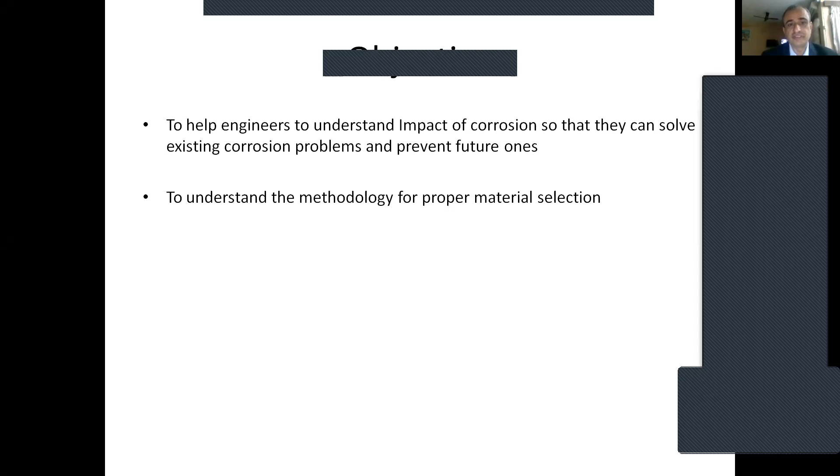The objective is to help engineers understand the impact of corrosion so that they can solve existing corrosion problems and prevent future ones, and to understand the methodology for material selection. I will cover this topic briefly. It could be a series of lectures on corrosion, but I will give you a brief introduction, and if another opportunity is given, I will connect those topics with this.

So, corrosion actually has a huge impact which is often overlooked. India is spending a huge amount of money on corrosion mitigation; the corrosion cost is very high for India.

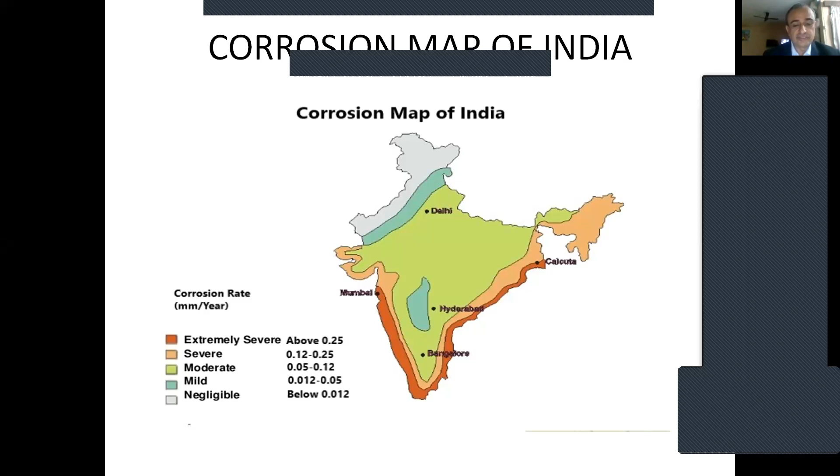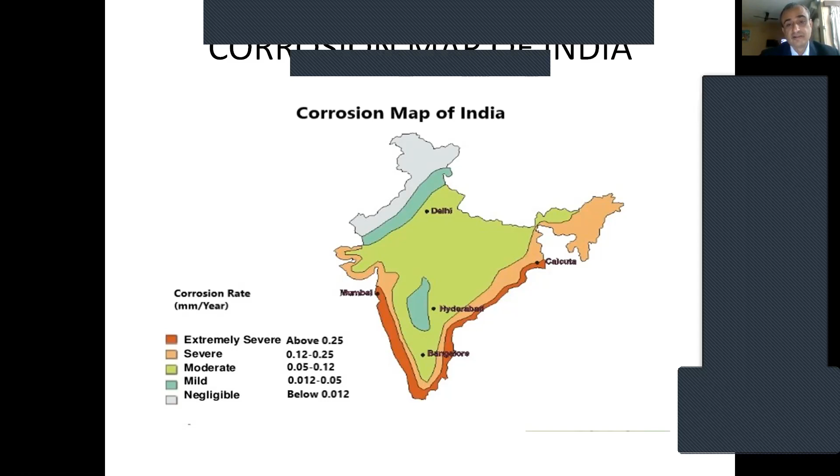So it's a huge cost for India due to corrosion. If you see the coastal line, around 7,000 kilometers from Mumbai to Calcutta, it is highly corrosive, with a corrosion rate of around 0.25 millimeter per annum. We are spending a huge amount of money on infrastructure and facilities. So just being aware of what corrosion is, the next topic can be how to mitigate it and what actions should be taken to mitigate corrosion.

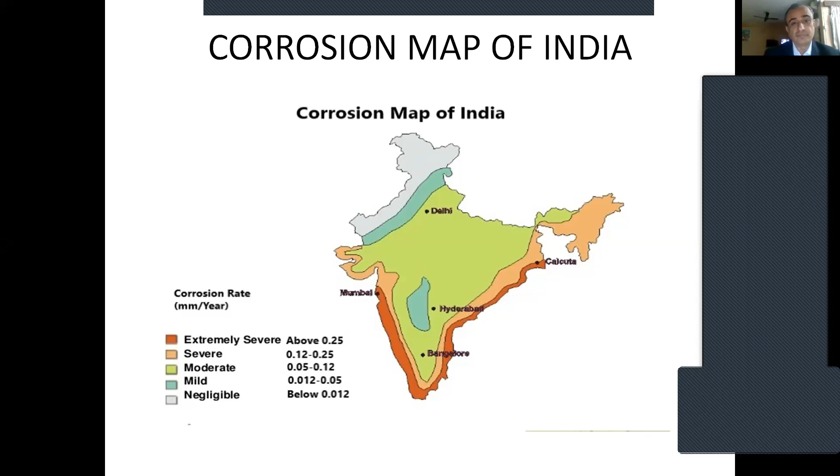Next slide is on corrosion. What is corrosion? It is the degradation of material by chemical reaction with its environment, as everybody is aware.

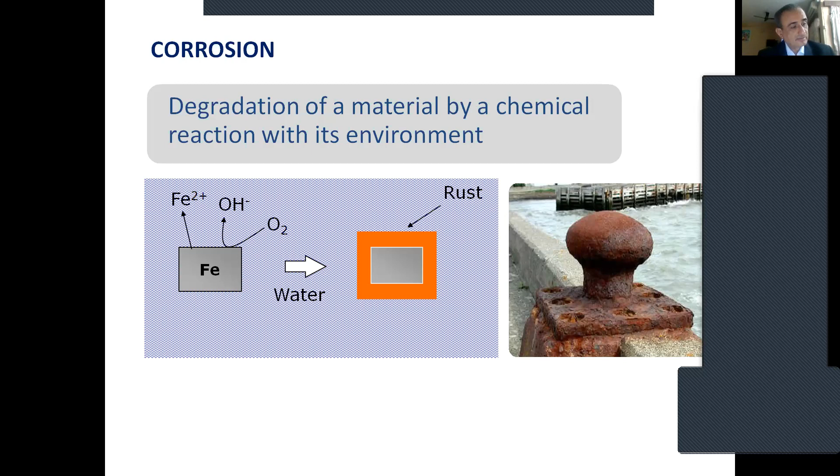Stainless steel: stainless is not always stainless. The passive layer on stainless steel consists mainly of chromium and iron oxide, and forms spontaneously in an environment containing enough oxidants. If the metal surface is exposed to mechanical damage, like a small scratch, the passive layer comes back immediately and it becomes stainless again. But if there are heavy scratches or dents, the original passive layer surface will not come back, and corrosion happens.

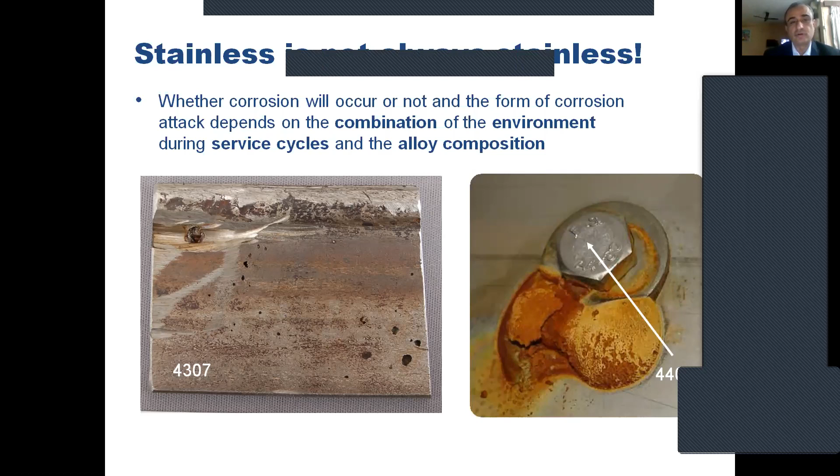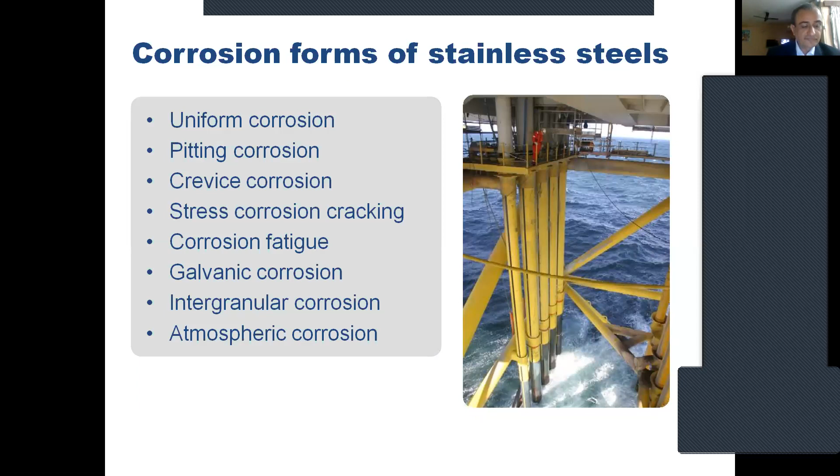I'll show you how many types of corrosion there are. The forms of corrosion in stainless steel are: uniform corrosion, pitting corrosion, crevice corrosion, stress corrosion, fatigue corrosion, galvanic corrosion, intergranular corrosion, and atmospheric corrosion. Different media and service conditions can cause different types of corrosion attacks, which may vary in nature and appearance.

Uniform corrosion occurs uniformly over the entire exposed surface or over a large area. Most cases of uniform corrosion occur in strong acid or hot alkaline solutions. It can be predictable too; if there's a constant rate and constant conditions, it can be predicted how many days it will take for this corrosion to happen, or how long the material will last.

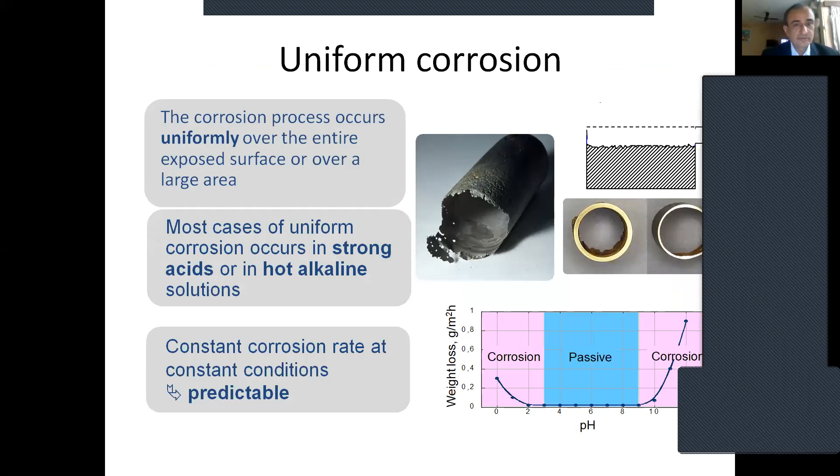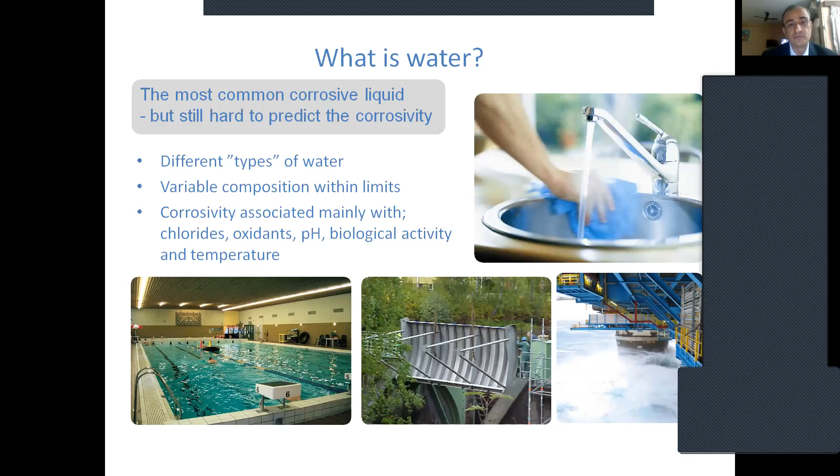There are many kinds of water - tap water, swimming pool water, and sea water - with different types and variable compositions within limits. Corrosivity is mainly associated with chloride, oxidants, pH value, biological activities, and temperature.

This chloride content in the tap water is around 250 ppm, less than 250 ppm. But salty taste is more than 250. Brackish water which mixes with the sea is around 3000 ppm, and sea water is 20,000 to 30,000 depending on the area. Different seas have different ppm. If you go to the Kolkata side, it's more ppm. If you go to the Bombay side, it's less ppm. So it varies area to area, but sea water chloride content is typically 20,000 to 30,000 ppm.

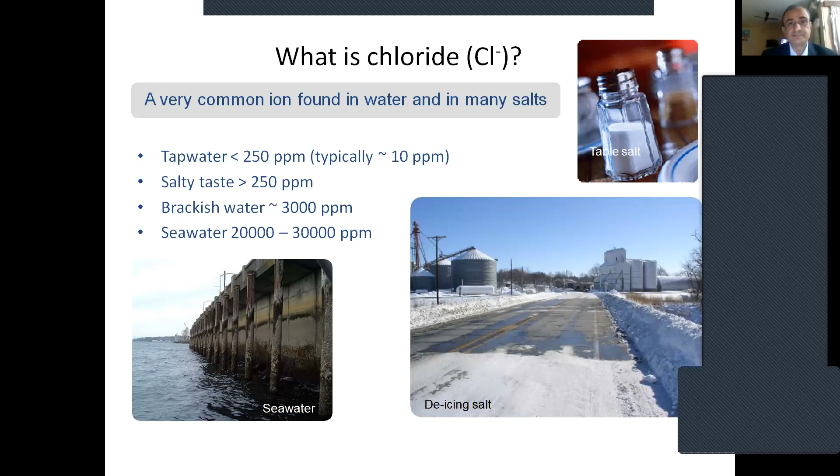This is another form of corrosion called pitting corrosion. Chloride ions cause a local breakdown of the passive film. The passive film is a very thin layer on the stainless steel surface, about 1/100th of the thickness of a postcard. That thin passive layer on the stainless steel prevents the surface from becoming corroded, so chloride causes a local breakdown of that passive film.

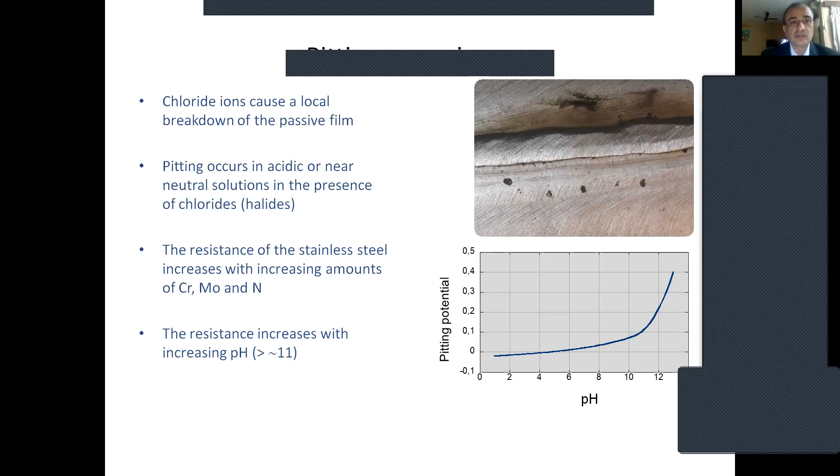Pitting occurs in acidic or near-neutral solutions in the presence of chloride or halide. The resistance of stainless steel increases with increasing amounts of chromium, moly, or nitrogen - these are elements in stainless steel. There are different kinds of stainless steel which I will cover in the future if I get the chance. The resistance also increases with increasing pH value greater than 11.

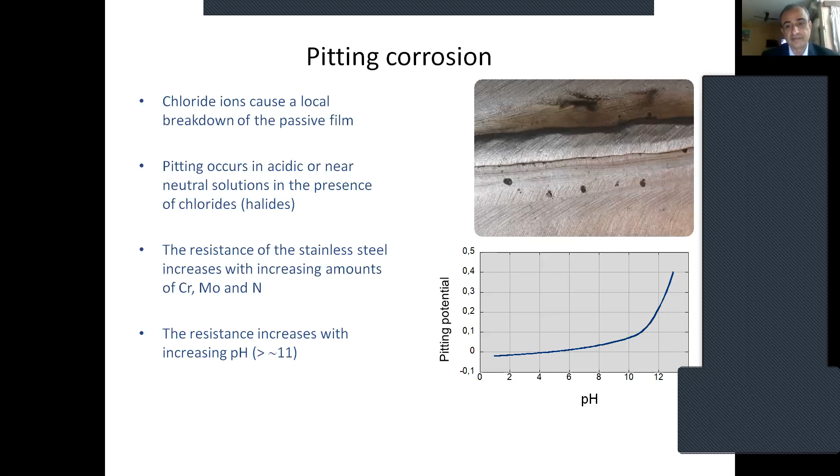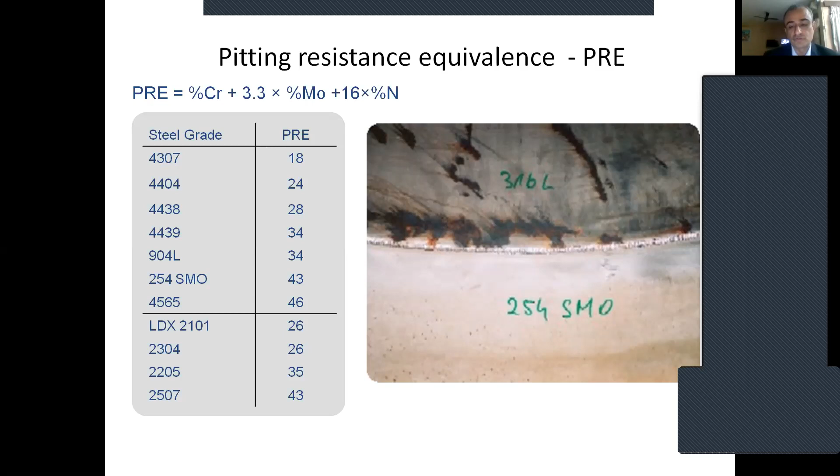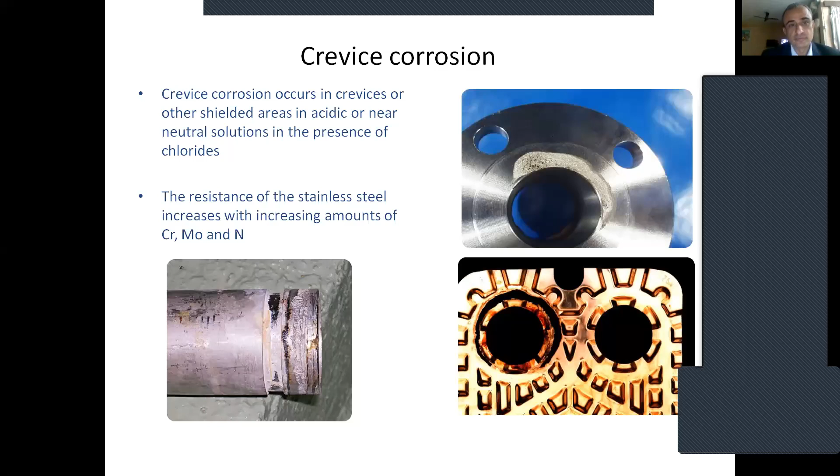Crevice corrosion is the example of flanges, or other areas like pipes and fittings. Where it's a shielded area, you can say crevice or other shielding area, it occurs in acidic or near-neutral solutions in the presence of chlorides. The resistance of stainless steel increases with increasing amounts of chromium, moly, or nitrogen - again, increasing these elements increases the corrosion resistant properties.

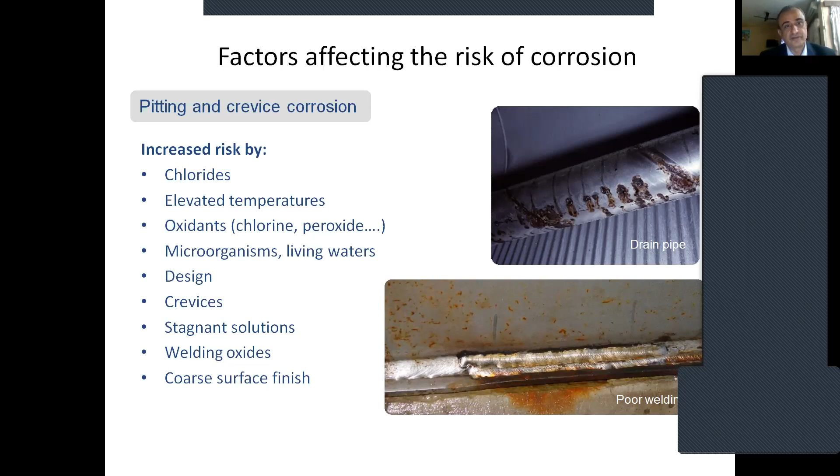Factors affecting crevice corrosion: the increased risk of corrosion, pitting and crevice comes from chloride, elevated temperature, oxidants, microorganisms, living waters, design crevices, stagnant solutions, welding oxides, and coarse surfaces. These are the factors affecting poor welding or drain pipes - you often see this kind of corrosion at various places, maybe in homes or offices.

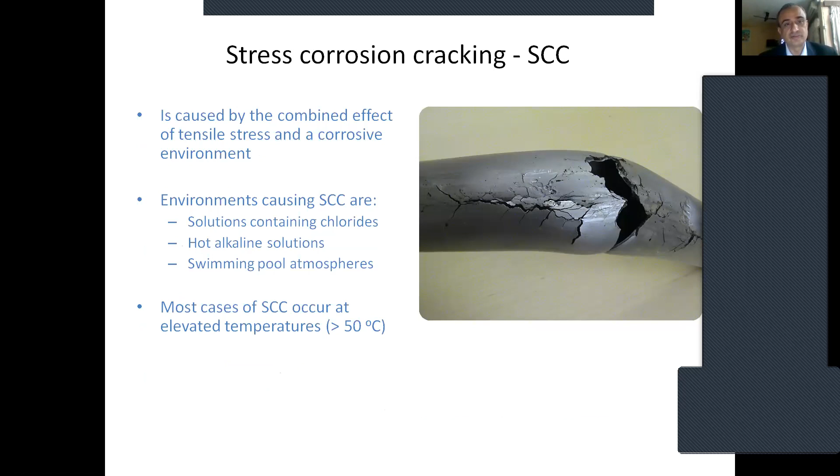This is stress corrosion cracking. It occurs due to elevated temperature and solutions containing chlorides, hot alkaline solutions, or swimming pool atmosphere environments - the combined effect of tensile stress and corrosive environment, caused by tensile stress and corrosive environment at elevated temperature. This occurs in swimming pools where load-bearing concrete roofs collapse due to stainless steel in safety-critical load bearing applications, in environments created by indoor swimming pools with anchored roof surfaces. This is stress corrosion cracking.

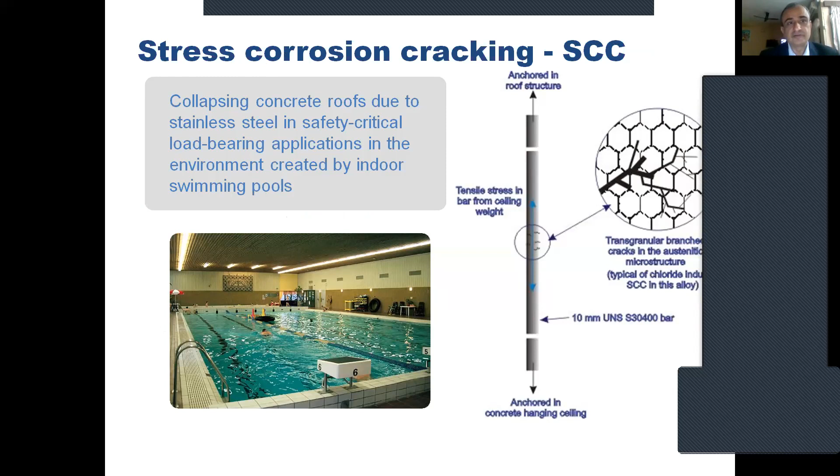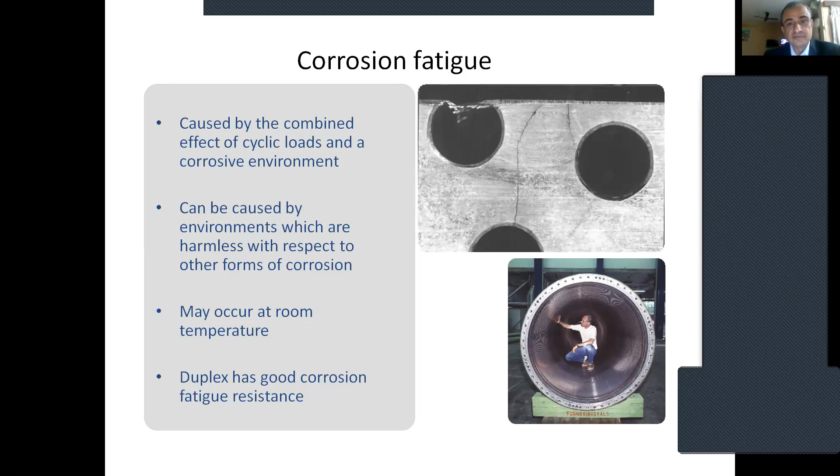Corrosion fatigue: it is well known that material subject to a cyclic load can fail at a load far below the ultimate tensile stress of the material. If the material is simultaneously exposed to a corrosive environment, failure may take place even at a lower load and after shorter times. So it's caused by the combined effect of cyclic load and corrosive environment, and can be caused by environments which are harmless with respect to other forms of corrosion - it may occur at room temperature. Duplex stainless steel has good corrosion fatigue resistance properties.

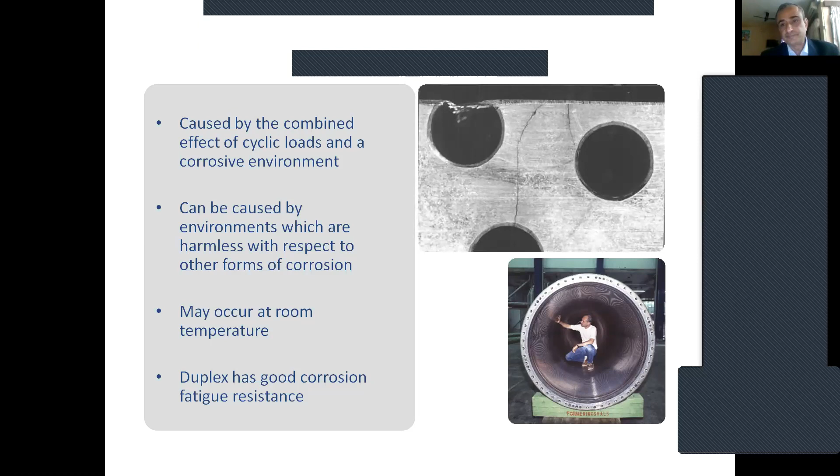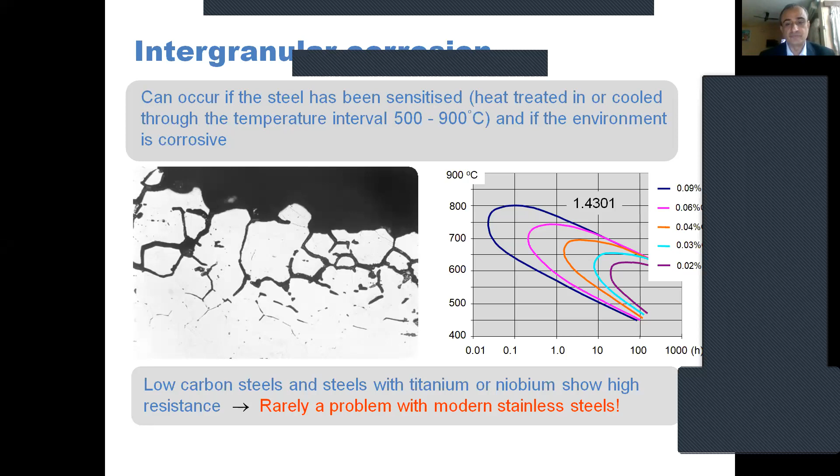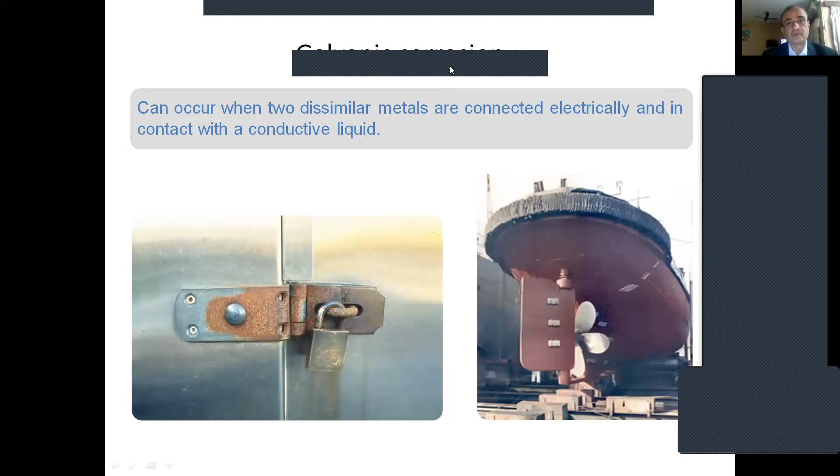The galvanic corrosion were two different... one minute, sorry sir, one person was waiting there.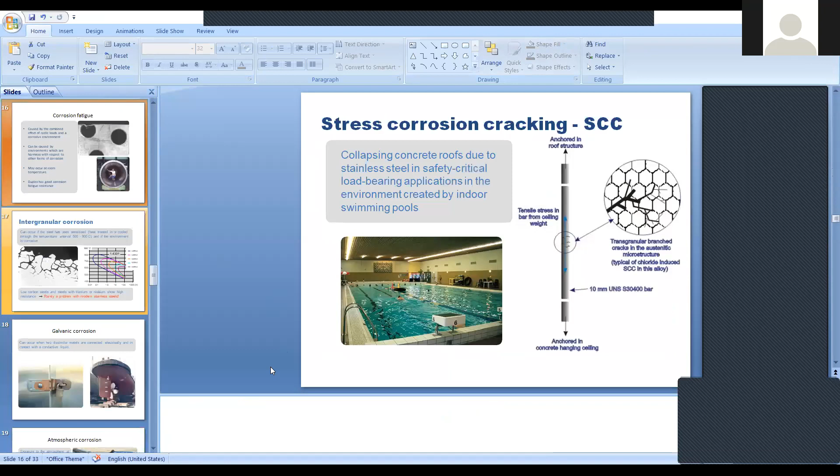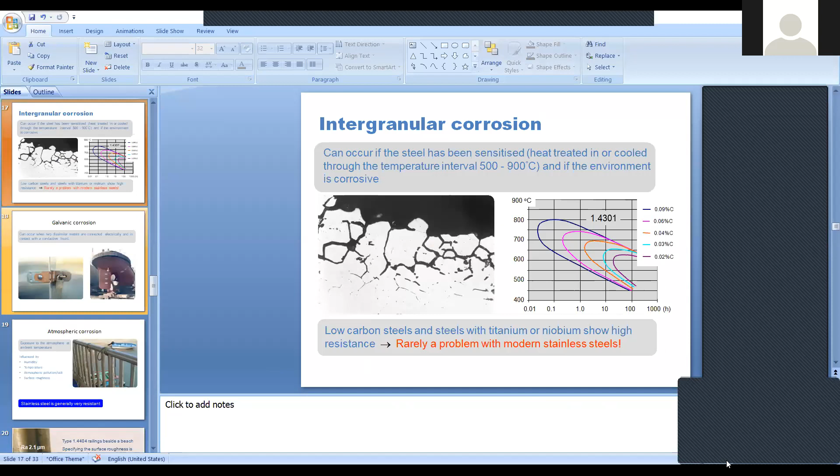Galvanic corrosion occurs where two dissimilar metals are connected electrically and in contact with a conductive liquid. So this is galvanic corrosion.

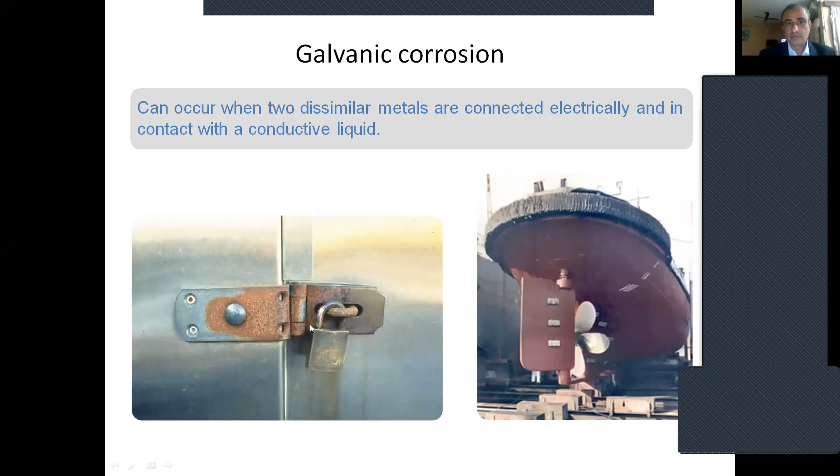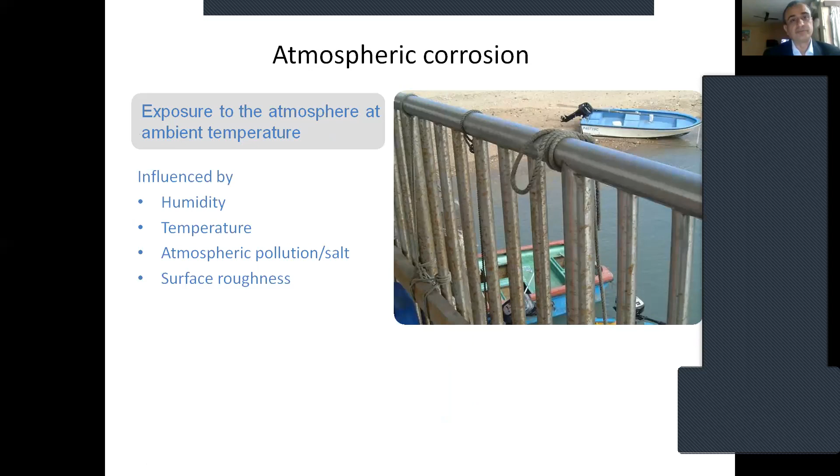How does this corrosion occur? This is atmospheric corrosion, influenced by humidity, temperature, atmosphere, pollution, and salt. All these forms of corrosion can be mitigated or removed easily by the selection of the right material at the right place.

It's a 316 railing beside the beach. On the beach also having discoloration. So discoloration will become rust at one day, and it will also become corrosive and then useless.

So specifying the surface roughness is almost as important as selecting the right grade stainless steel. If it is a very finished surface where the moisture cannot stay there, it will stay longer, or maybe corrosion cannot occur. If it is a rough surface, not smooth, like RA factor is 2.1 micron.

RA factor is 0.74 micron. You see this point where the roughness is more, where the moisture content can stay there on the surface, it can discolor and then corrode. Here in this surface is very smooth, 0.74 micron is the surface of the stainless steel, so no moisture content can stay there, so it will be helping in corrosion resistant properties.

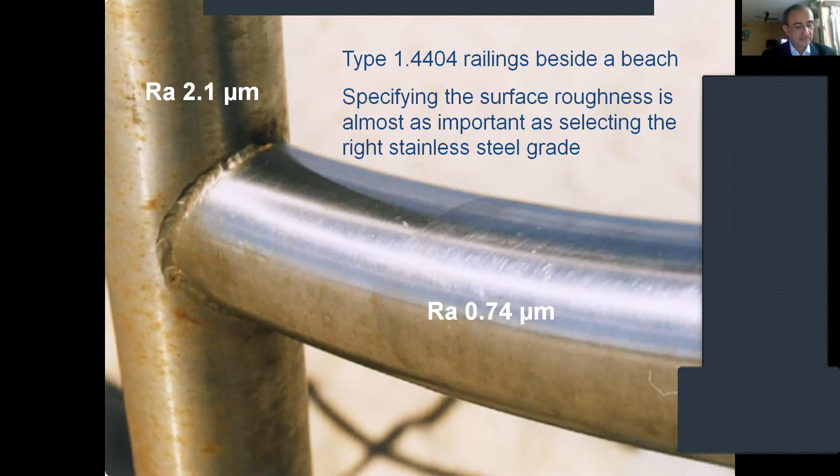It's one of the projects which I was doing during my tenure in the industry when I was working there, so till today also I am in touch. This is a storage tank facility of IOCL at coastal area. This is huge tankage all over India, so population of the tankage is there, and in all the tankages you find corrosion somewhere here or there. So they are spending a huge amount of money.

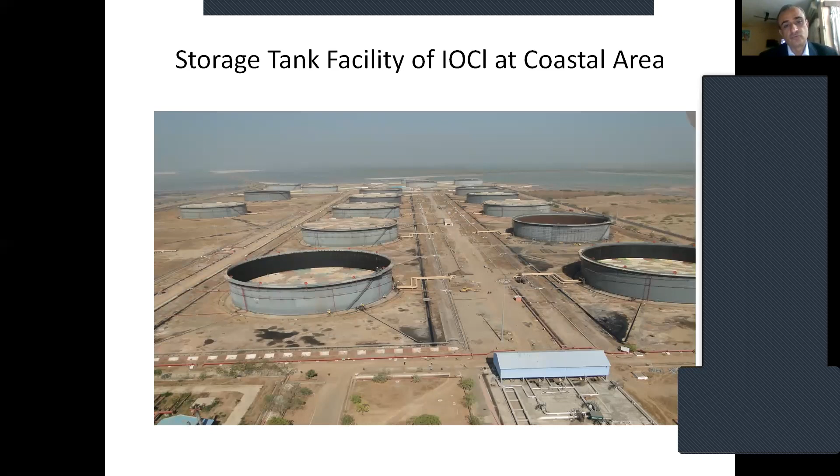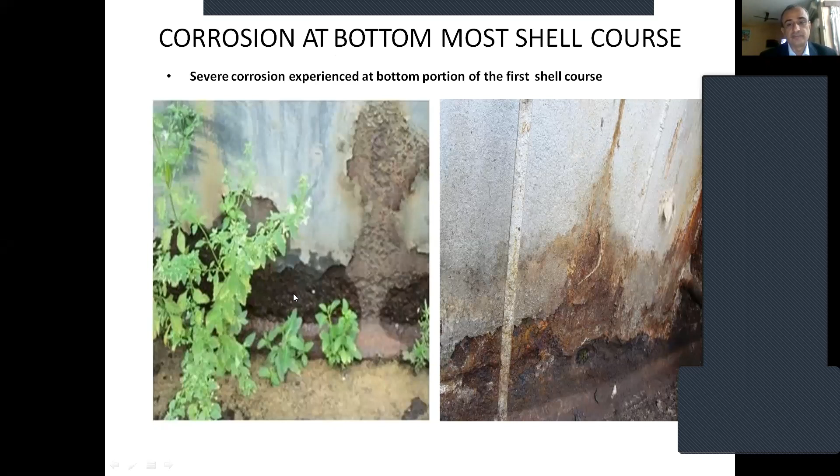Even the rooftop of the stainless steel, 316 rooftop, gets perforated within 5 years time. So this is, you can say, another form of corrosion. It's a leak seepage from the storage tank, a severe corrosion at the bottom of the tank. First shell course, see this corrosion.

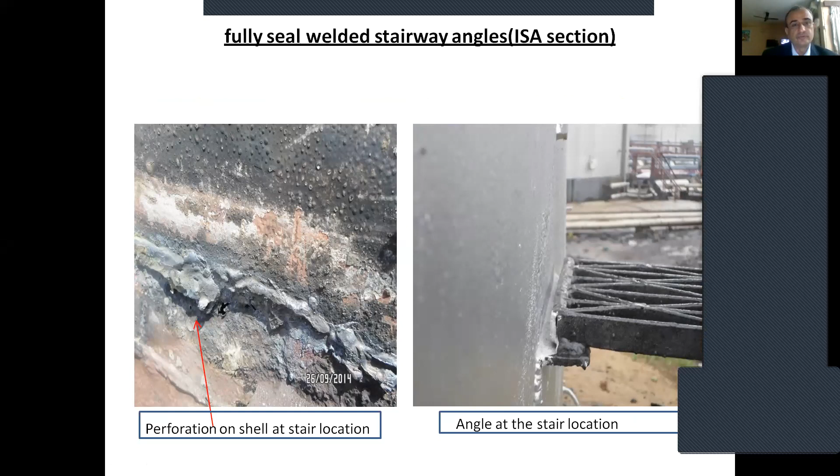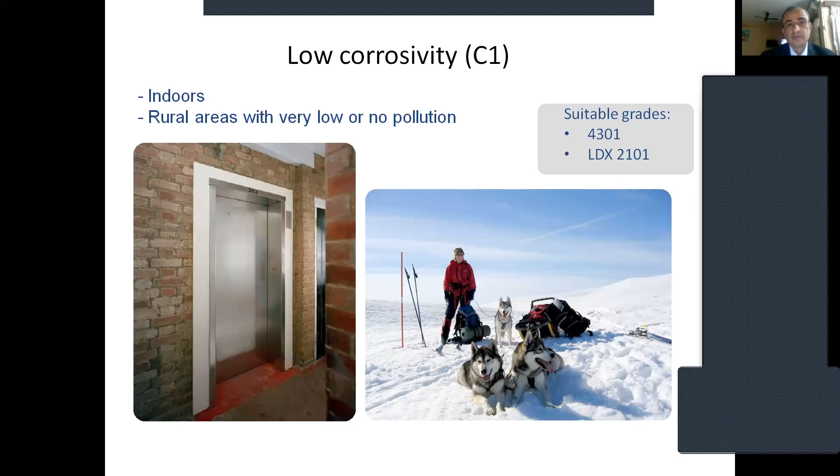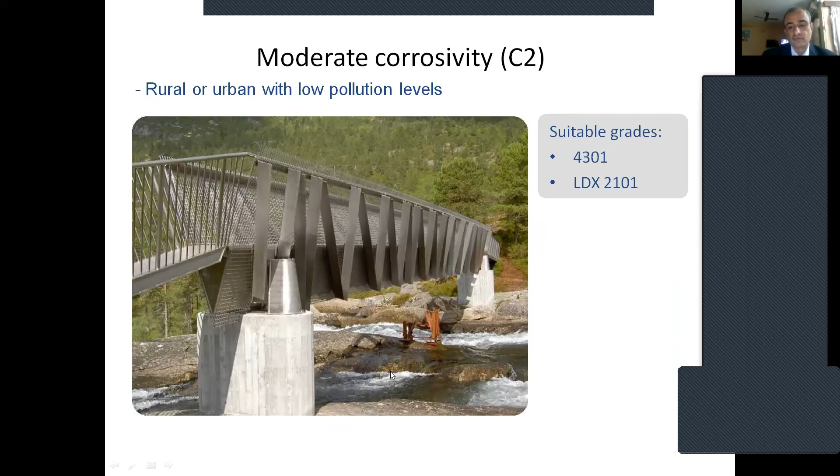It's a corrosion having different levels, which I will be covering in some other presentation. So low corrosivity C1 indoors, rural area where very low or no pollution, 304 type of grades also mentioned there. Moderate kind of corrosivity where rural or urban with low pollution level, so it's also stainless steel, but a moderate kind of corrosivity, so 304 material will be okay for that kind of application.

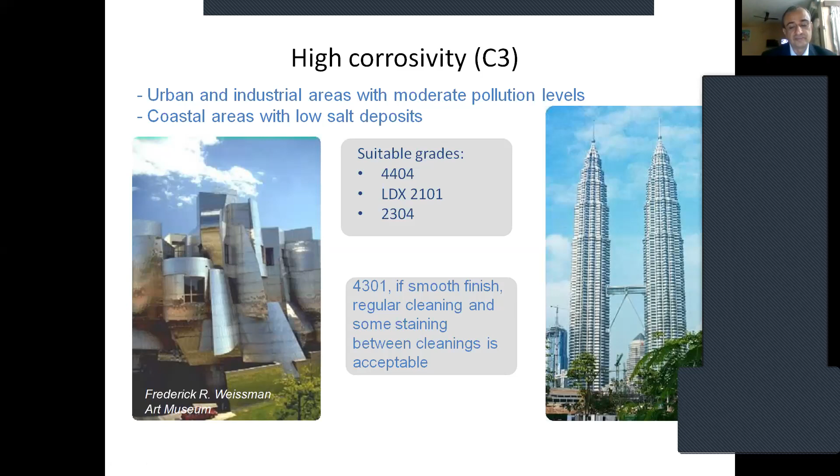Urban and industrial area where moderate pollution level, but here you have to clean the surface properly. These surfaces are to be cleaned. If you have seen the Delhi Metro also getting cleaned every day. So if they don't clean it, that is also 4301 material, 304 material outer surface - corrosion may occur very soon on that surface, so they have to clean every day. This coach of Delhi Metro getting cleaned, 4301 example, again, it's cleaned regularly.

You have to clean it if it is a smooth surface and surface finish - the surface roughness value is most important, like RA factor. If RA value is very smooth, 0.74 or 0.25 instead, then chances of corrosion are very less. You just clean it.

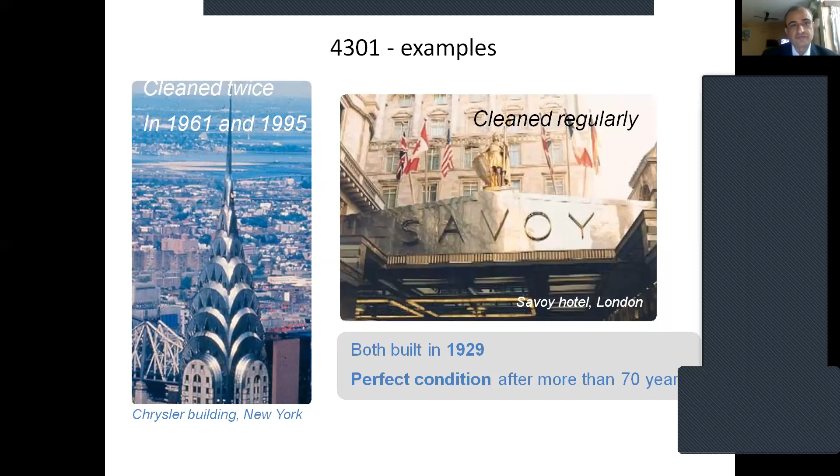Its life is increased. This high corrosivity area where the seawater offshore applications - like I showed you that applications of also that is a high corrosivity. 4404 is a 316 smooth grade surface finish used, but that is also getting perforated. Our stainless steel, carbon steel tank with the stainless steel roof, that is also getting perforated in 5 years time in the coastal area. That's a high corrosivity area.

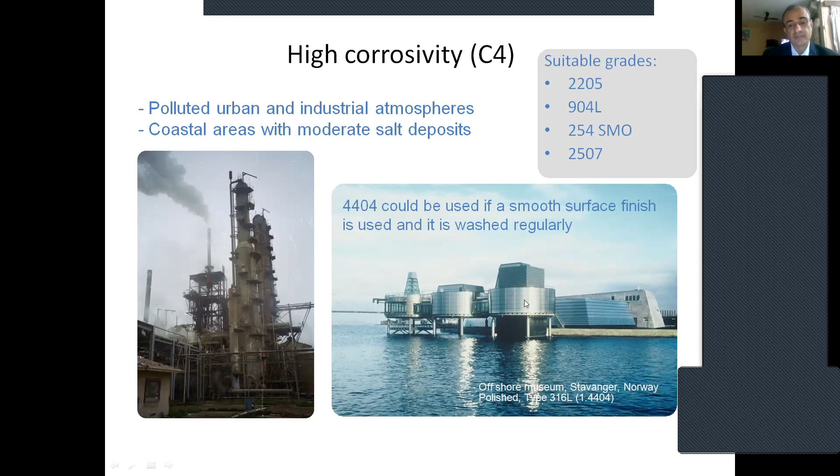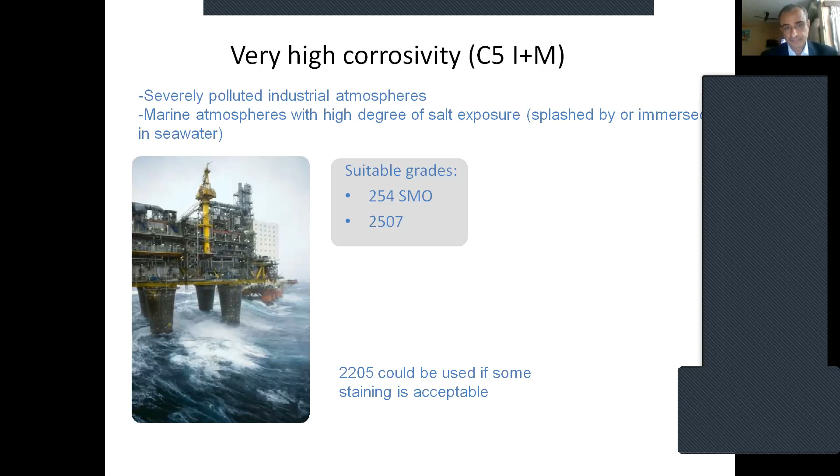2205 kind of grade, duplex grade or some other higher grade applications are there for that. So it's a high corrosivity, again offshore application where the oil rigs, their oil comes out from the sea. So here again the grades are 2507 or 254 SMO, another stainless steel high grade with PRE, pitting resistant equivalent number higher than 42, 43. So that is used where high corrosivity is there, marine atmosphere and high degree of salt exposure.

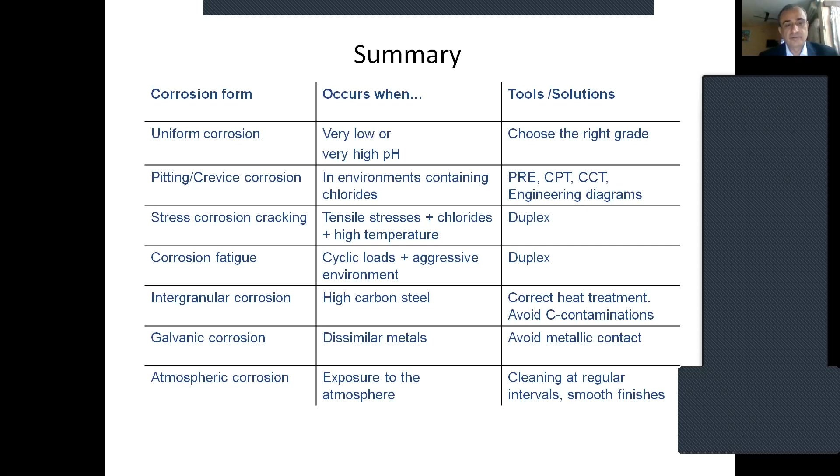Intergranular corrosion is due to high carbon steel and incorrect heat treatment process. Galvanic corrosion occurs between dissimilar metals, and atmospheric corrosion results from exposure to the atmosphere.

So this is a summary. And the conclusion is that stainless steel, since this presentation is made only for stainless steel, is not always stainless. Whether corrosion will occur or not, and the form of corrosion attack, depends on the combination of service environment and alloy composition. There are environments which cause permanent breakdown of the passive layer. Under circumstances where the passive layer cannot be rebuilt, corrosion occurs on the unprotected surface.

It is important to know what you expect from the steel. Does it have to be bright, or can staining be accepted? So it depends on the demand and expectation. There are tools for making correct material selections, which can also be covered in the next presentation if given a chance.